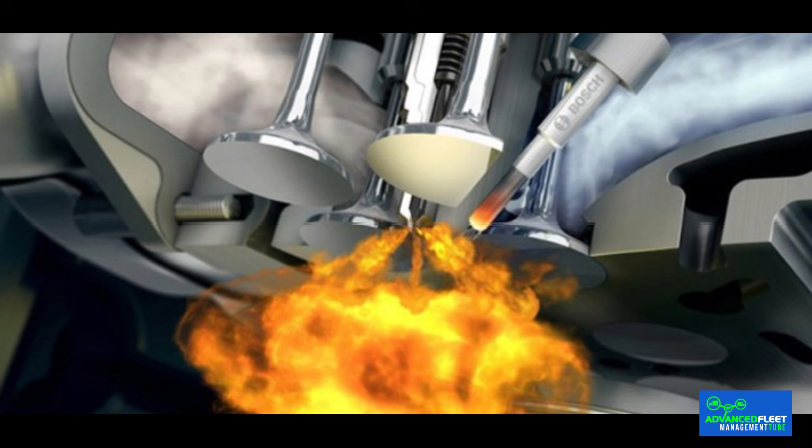Why do diesel engines need to be preheated? The diesel engine differs significantly from the gasoline engine. Unlike a gasoline engine, a diesel engine has no spark plugs and ignites the fuel solely by applying high temperatures and pressures in the combustion chamber, a process known as self-ignition. For spontaneous combustion to occur, a temperature of around 800 to 900 degrees Celsius must be reached in the combustion chamber. In cold weather conditions, compression heat alone is not sufficient.

For this reason, electrically heated glow plugs are used to raise the temperature of the air in the cylinder, thereby facilitating the starting process. The electric glow plugs protrude into the cylinder and are heated for the starting process by an electric current. This process ensures that the auto-ignition point is reached more quickly. Once the engine reaches the optimal temperature, the system no longer requires the preheating function and the glow plug remains off.

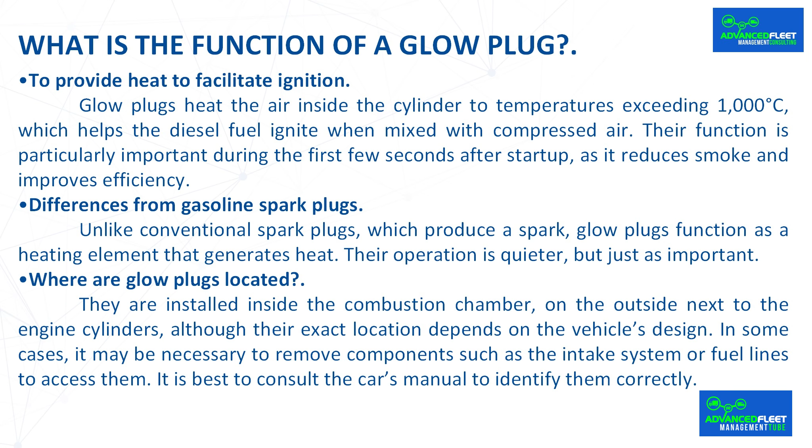What is the function of a glow plug? To provide heat to facilitate ignition. Glow plugs heat the air inside the cylinder to temperatures exceeding 1000 degrees Celsius, which helps the diesel fuel ignite when mixed with compressed air. Their function is particularly important during the first few seconds after startup as it reduces smoke and improves efficiency.

Differences from gasoline spark plugs. Unlike conventional spark plugs, which produce a spark, glow plugs function as a heating element that generates heat. Their operation is quieter, but just as important.

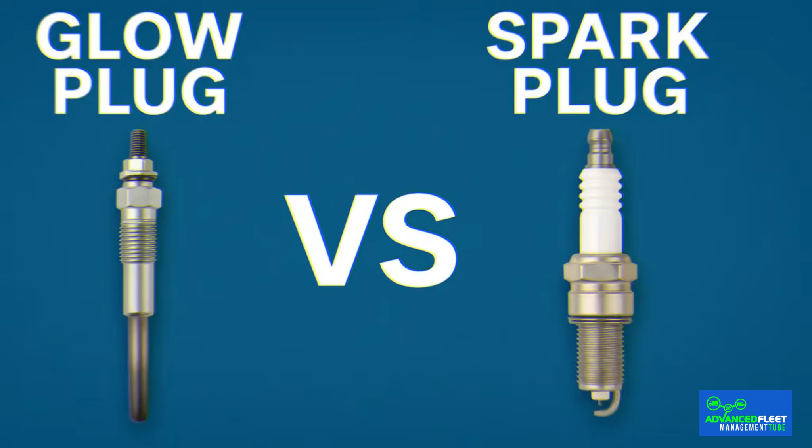Where are glow plugs located? They are installed inside the combustion chamber, on the outside next to the engine cylinders, although their exact location depends on the vehicle's design. In some cases, it may be necessary to remove components such as the intake system or fuel lines to access them. It is best to consult the car's manual to identify them correctly.

How preheating works in modern diesel engines. Modern diesel vehicles are designed to eliminate the wait time associated with preheating, resulting in a more efficient and faster experience for the user. The system's preheating is activated automatically when the door is opened or the ignition key is inserted. Direct injection diesel engines, which are now used almost exclusively, require only a brief preheating period at notably low temperatures immediately before starting the engine.

Furthermore, modern glow plugs reach the desired temperatures more quickly than they did a few decades ago. As a result, delays in engine startup have been minimized.

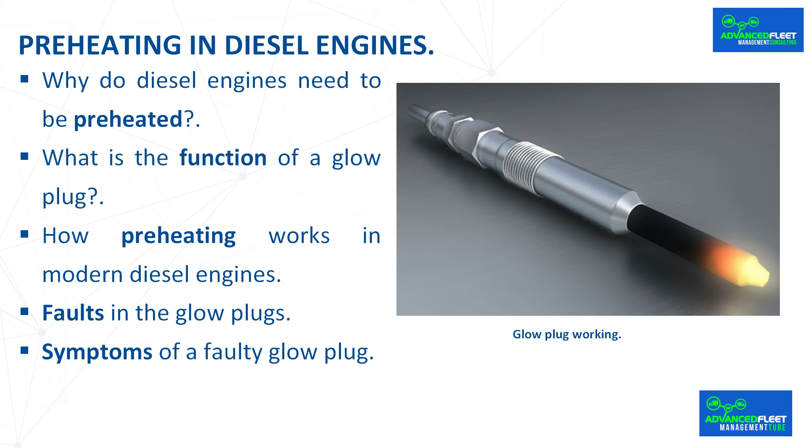Faults in the glow plugs. However, it is crucial to pay attention to certain warnings in the case of a diesel vehicle. When the preheating light is on, the engine is also preheating. This situation is common and indicates that the engine is not yet ready to start. However, if the preheating light flashes continuously, there is a possibility that a fault has been detected, which may have the following various causes.

Wear and tear from prolonged use. Over time, these components can undergo natural deterioration due to the high temperatures and pressures they are exposed to during the heating process, which can reduce their ability to generate heat efficiently.

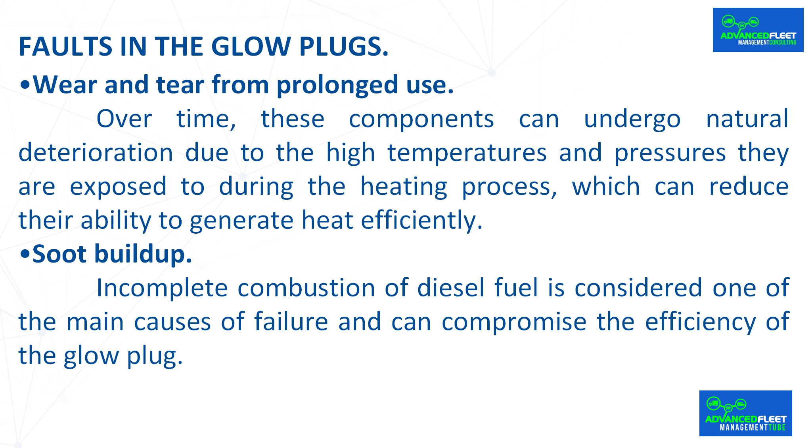Soot buildup. Incomplete combustion of diesel fuel is considered one of the main causes of failure and can compromise the efficiency of the glow plug.

Problems with the injectors. If an injector leaks or sprays fuel poorly, there is a possibility that it will spray a direct jet of diesel onto the glow plug. This situation can cause thermal shock and temperature overload, resulting in the glow plug breaking.

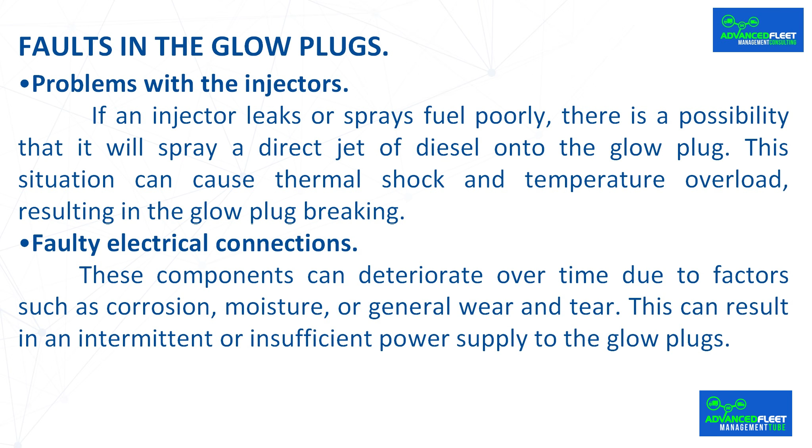Faulty electrical connections. These components can deteriorate over time due to factors such as corrosion, moisture, or general wear and tear. This can result in an intermittent or insufficient power supply to the glow plugs.

Symptoms of a faulty glow plug. Deposits resulting from fuel combustion are the main reason these components stop working properly. A faulty glow plug can produce multiple symptoms.

Starting problems. This is the main sign that a glow plug is malfunctioning. These problems occur mainly in cold weather and when there is high humidity. If the glow plug does not generate enough heat, the cylinder will not get hot enough for combustion to begin.

Poor acceleration. If one of these components fails, you'll notice that the car doesn't accelerate as it should when you press the accelerator. However, other engine problems can also cause this issue.

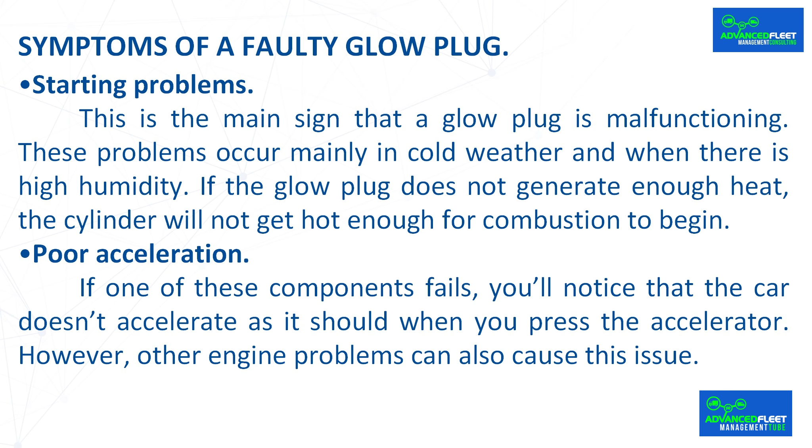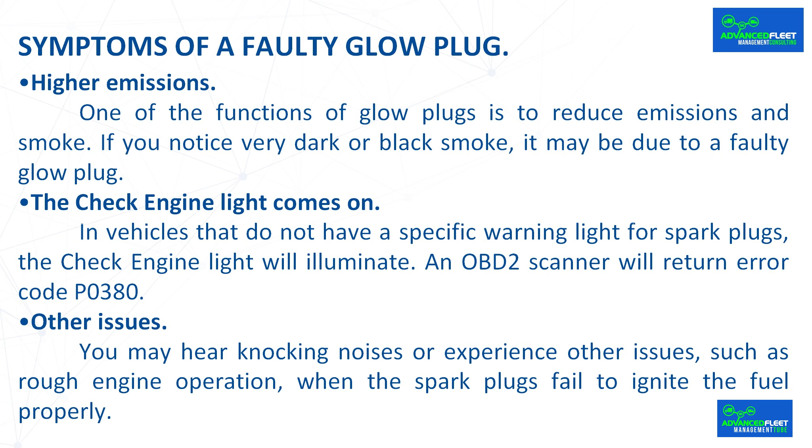In vehicles that do not have a specific warning light for spark plugs, the check engine light will illuminate. An OBD2 scanner will return error code P0380. You may also hear knocking noises or experience other issues, such as rough engine operation, when the spark plugs fail to ignite the fuel properly.

How do you check the condition of the glow plugs? You can perform a manual check with a multimeter. If you have basic mechanical knowledge, you can perform this preliminary check.

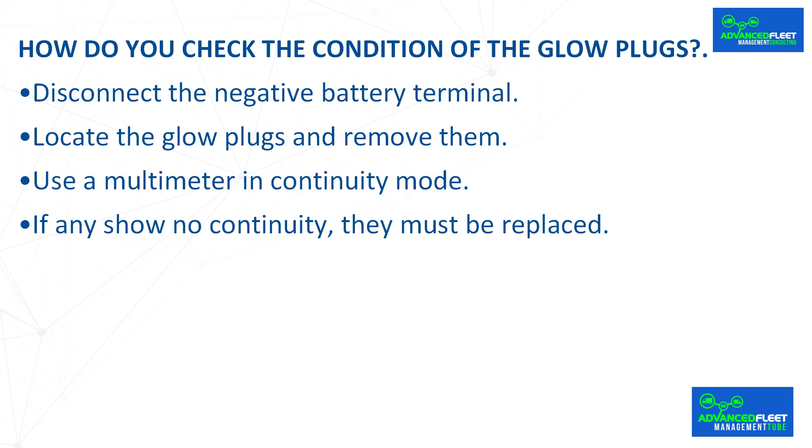Disconnect the negative battery terminal, then locate the glow plugs and remove them. Use a multimeter in continuity mode. If any show no continuity, they must be replaced. A single faulty glow plug can affect engine starting and performance.

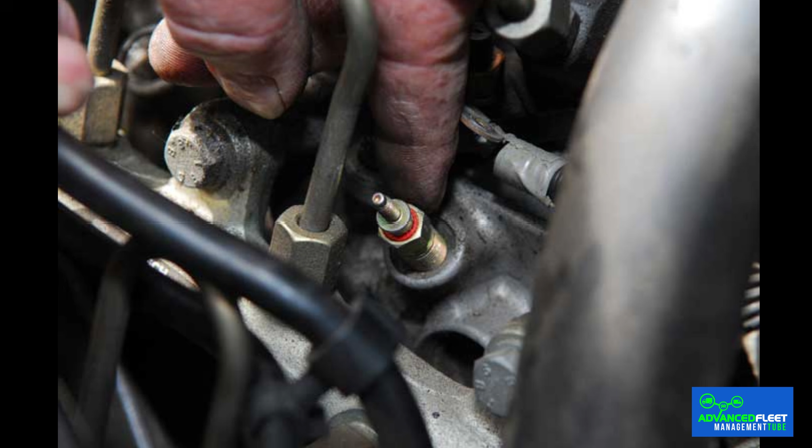How do you replace glow plugs? Replacing glow plugs is a task you can perform if you have the right tools and some experience. Disconnect the battery, access the glow plugs by removing any necessary components, then unscrew each glow plug and carefully remove it.

Apply lubricant to the threads of the new ones to facilitate installation. Make sure to align them correctly before tightening them. Ideally, replace all of them at the same time for consistent performance.

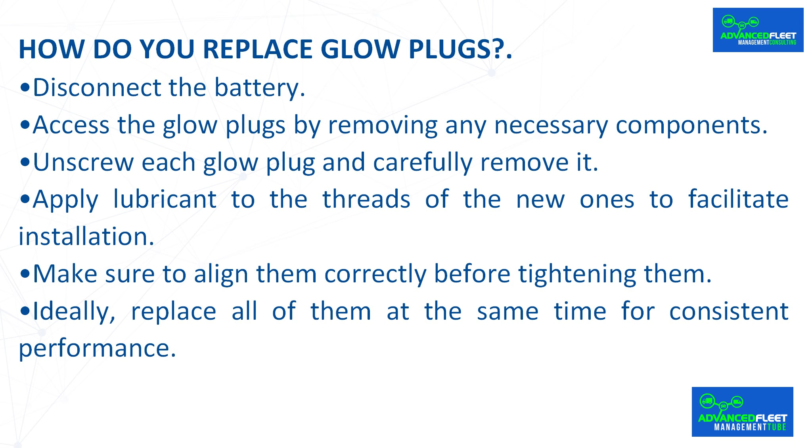How long do glow plugs last, and how much do new ones cost? Generally speaking, glow plugs have a service life that can extend up to 100,000 kilometers or, in many cases, even longer. When a problem occurs, such as poor engine starting in cold weather, it will be necessary to replace the glow plugs. However, it is important to note that poor engine starting can be caused by various factors.

A reputable repair shop can provide an accurate and efficient diagnosis. It is important to note that vehicles used for short trips should have their glow plugs replaced sooner than those used for long trips. Frequent cold starts also cause glow plugs to wear out more quickly.

A diesel engine is equipped with one glow plug per cylinder. In the case of a 4-cylinder engine, 4 units must be replaced. The cost of a glow plug ranges from 10 to 20 euros, while replacement at a repair shop can vary between 150 and 300 euros, depending on the vehicle's model and engine.

Problems with the timer control. The timer on diesel preheaters is a critical component in the preheating process prior to starting a diesel engine, as its primary function is to control how long the glow plugs remain lit before the engine is started.

It is important to note that problems with the timer control can arise for various reasons, some of the most common being aging of the component. Electrical components are subject to natural wear and tear due to use and the passage of time, which can result in inefficient operation, presence of moisture or corrosion. Exposure to these factors can cause problems with the electrical contacts, directly affecting the part's operation.

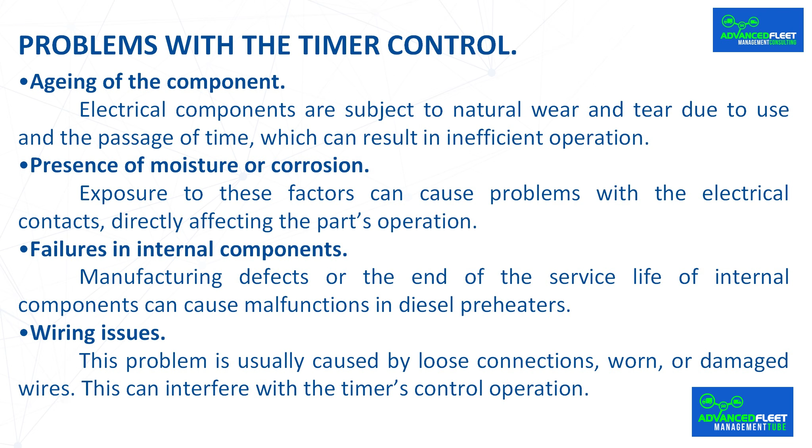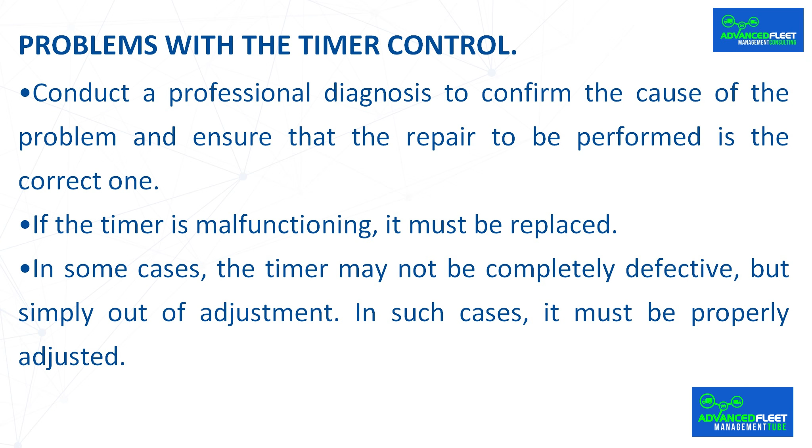To resolve issues with the timer control, you can conduct a professional diagnosis to confirm the cause of the problem and ensure that the repair to be performed is the correct one. If the timer is malfunctioning, it must be replaced. In some cases, the timer may not be completely defective but simply out of adjustment. In such cases, it must be properly adjusted.

Implications for fleet management. The main consequence of a glow plug failing is that the engine will not start and it must be replaced, incurring costs and downtime while the vehicle is out of service. We recommend implementing the following measures.

Wear and tear on the glow plug. Due to wear and tear from use, the glow plug will eventually need to be replaced, causing the engine to fail to start and rendering the vehicle unusable for a period of time.

Glow plugs do not give any warning before they stop working. They fail suddenly. You may find that a glow plug is working fine one moment and then stops working the next time you start the engine. In my experience, glow plugs are often replaced only after they stop working, which is a bad practice. They should be replaced at the mileage intervals recommended by the vehicle manufacturer.

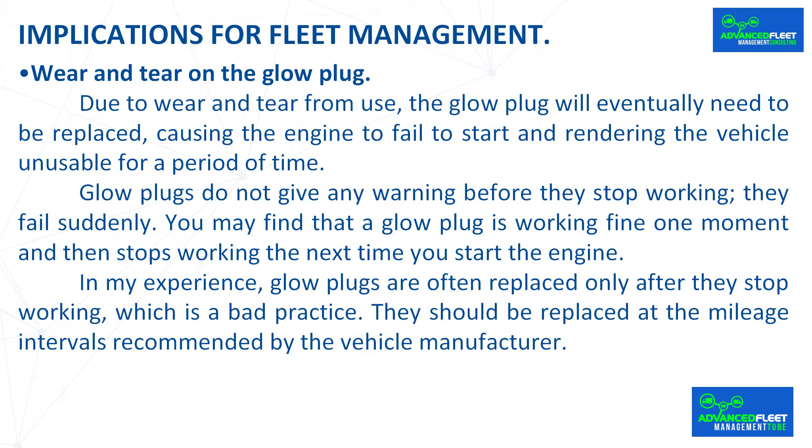Use premium replacement parts. It is recommended to use glow plugs from premium manufacturers. This is a part that needs to be replaced over time and mileage, and if it fails, the vehicle cannot be used. Replacement of all glow plugs.

If a defective glow plug is detected, it is recommended to replace the entire set to ensure uniform heating across all cylinders and avoid repeated disassembly in the short term.

Driver training. Drivers must be trained to notify the workshop manager or fleet manager if the preheating indicator light on the dashboard flashes continuously or if the engine has trouble starting.

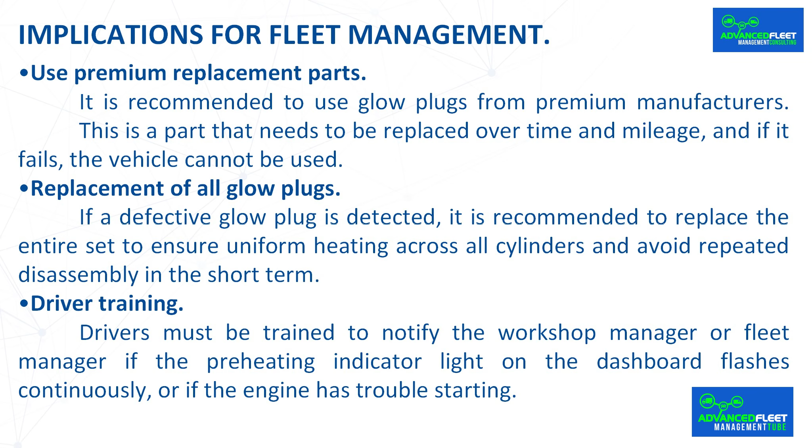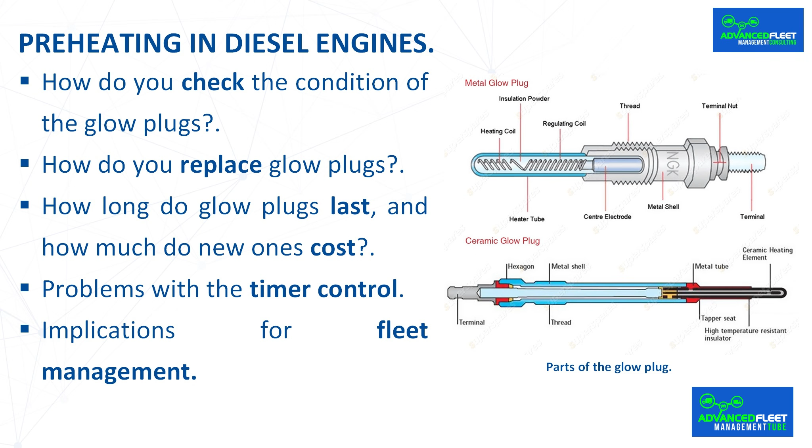In summary, a damaged glow plug can cause misfires, increased fuel consumption, high emissions, and make it difficult to pass the vehicle inspection. Furthermore, forcing the engine to start without the aid of these glow plugs can wear out other components. Proper maintenance and following the manufacturer's recommendations will prevent costly breakdowns and improve the vehicle's overall reliability.